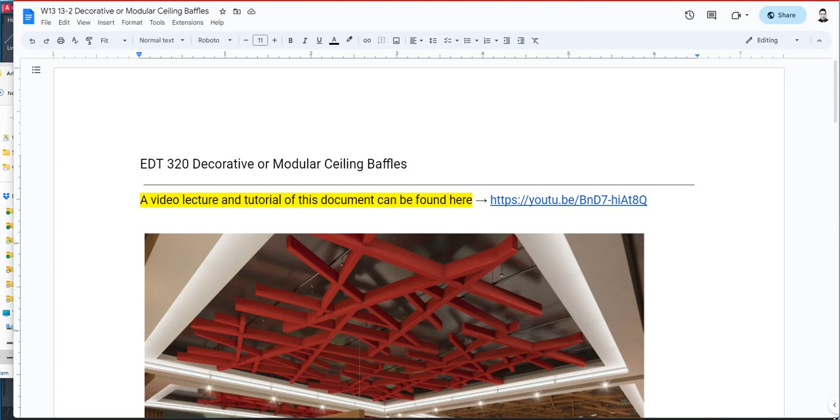So you're watching the video lecture and tutorial of this document, and when we discussed the ceiling plan, we momentarily discussed a baffle system used on ceilings. It's primarily a decorative element, but its real purpose is to stop the echo in large rooms. In a large room with no walls nearby, sound travels far, bumps into a wall, and bounces back, producing an echo. To prevent that, large rooms use a baffle system like this one, or sometimes the wall is treated with acoustic absorbing materials. So that's primarily its purpose, to stop the echo, but it's often used for decorative purposes too.

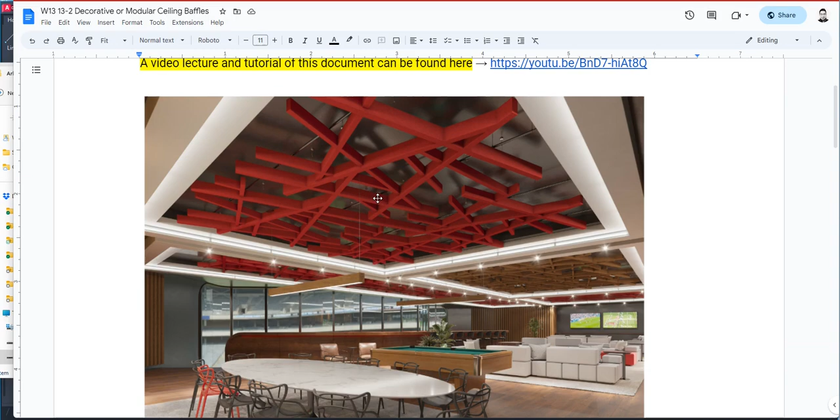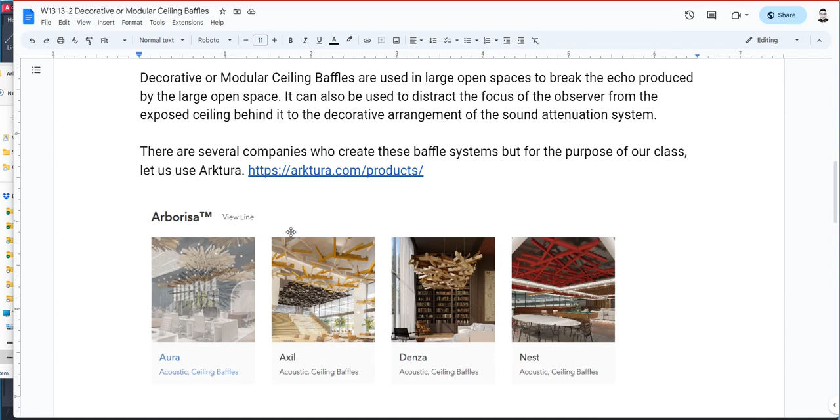There are several manufacturers of this baffle system, but for the purpose of our class, let's focus on Arktura products. There's a lot of products you can choose from the Arktura lineup, including some lighted systems. We're going to use either the SoftGrid baffling system or the Arborisa baffle system, and you can also see some geometric shapes under their SoftShapes system.

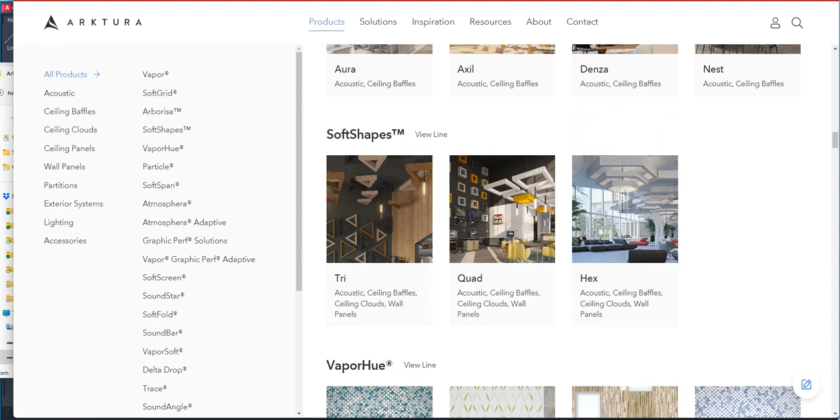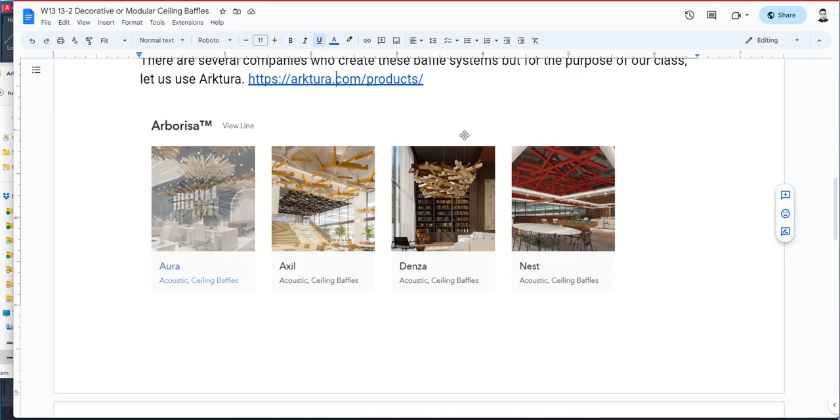Let's focus on our usage of the baffle system under the Arborisa product line, and we'll focus on this one called the Nest. Here's the Arborisa Nest, and you can see it's designed so that you can install several of them, and it appears to be modular. You can also cut them to width.

If we click on this one and open up the Arborisa lineup, you can see several applications of this system, and they come in different colors. As you can see here, there's information on acoustic performance, available materials, and available colors.

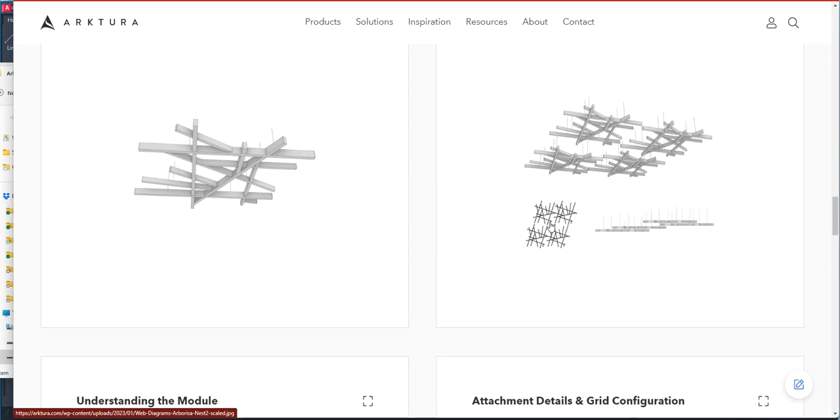Okay, and then you would see here the standard module, and how you can design the modules is basically like this. I don't know if you can see that closely, but let's use the PDF system here.

Arktura provides several downloads of their lineup, either in a DWG file, which is AutoCAD, or an SKP file, which is SketchUp. You also have the RFA, which is your Revit file, or assembly, a family file. If you've taken Revit, you can import family assemblies.

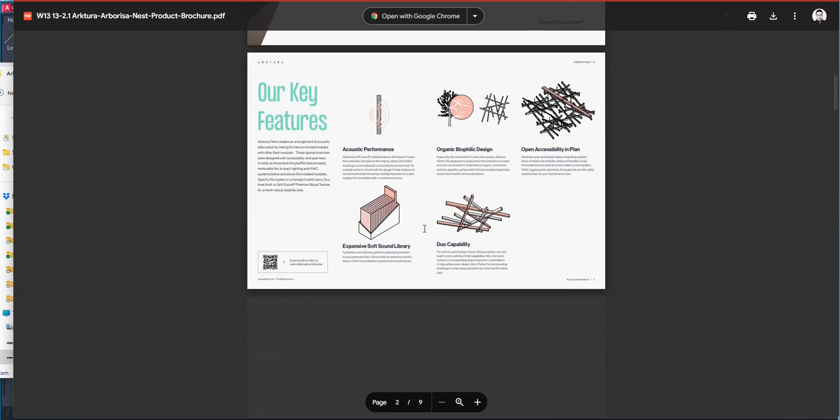And the DWG file, so let's look at this PDF file first. When we open the PDF file, it should show us how this module is installed, its properties, and everything about its color too.

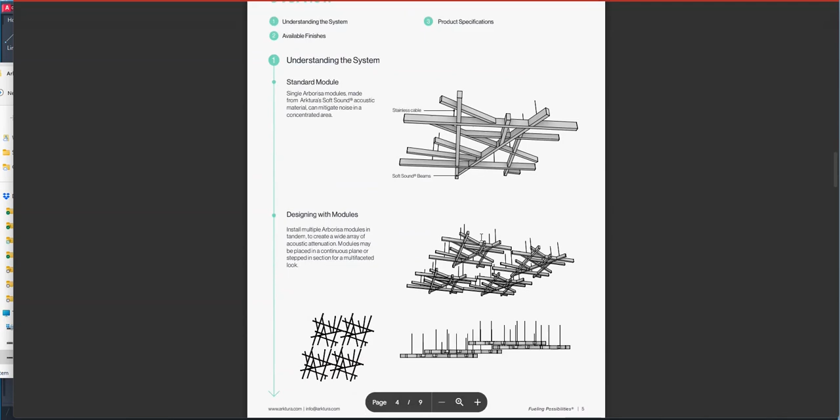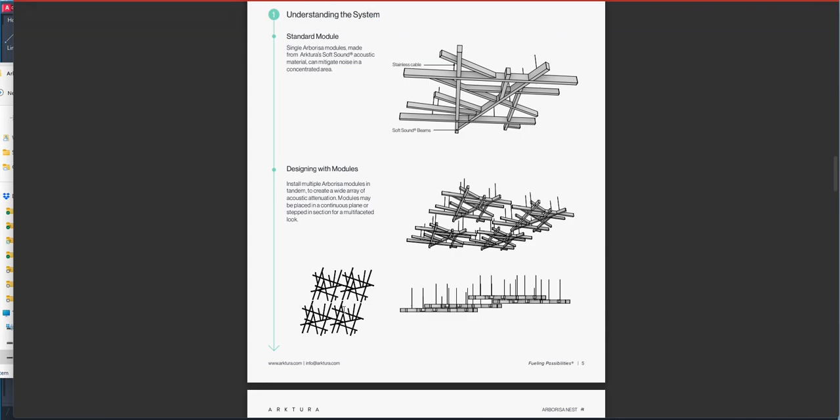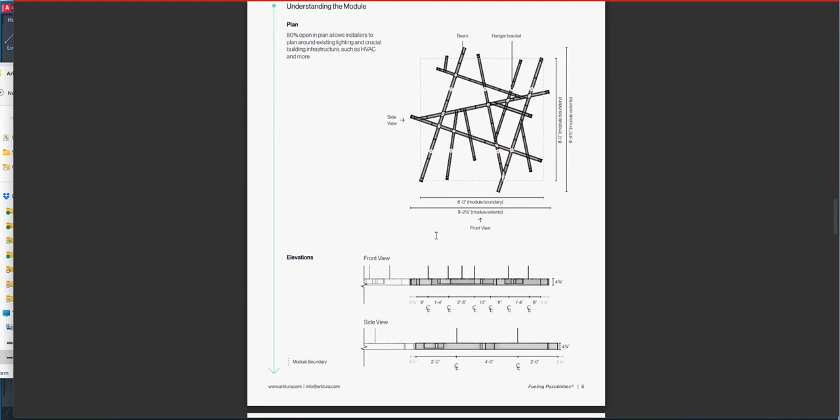It comes in different colors, and down here you should see how it can be installed in a module, like sort of diagonal, but you can straighten that up. And then here's the measurements and dimensions. These red dots appear to be where they are hanged from, so that's their hanging point, and their attachments are seen here.

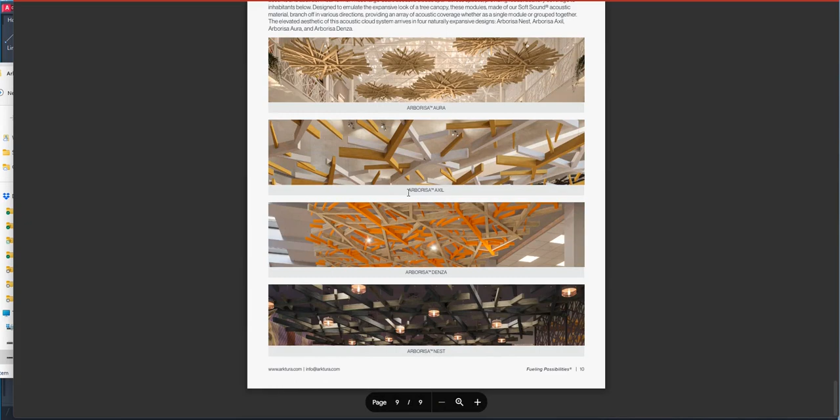Looks like there's a way you can join their modules like this. You can join them like so. This is another setup for their system. You can rearrange them, change colors, have dual tones, everything like that. Okay, so very decorative. Let's use that.

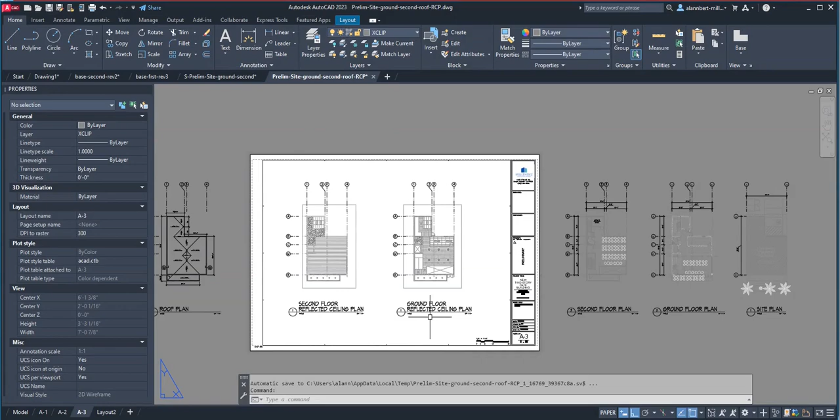Okay, so let's switch to AutoCAD. Here is now our A3 sheet with our ground floor reflected ceiling plan, with exposed lights. And here's our second floor reflected ceiling plan without the lights yet, because we're going to put in the lights for this one. There's, I think, storage or office space here. We need to fix this.

It's a little darker than the rest. But yeah, so we use a hard top ceiling here, or I use a hard top ceiling. But let's fix that first.

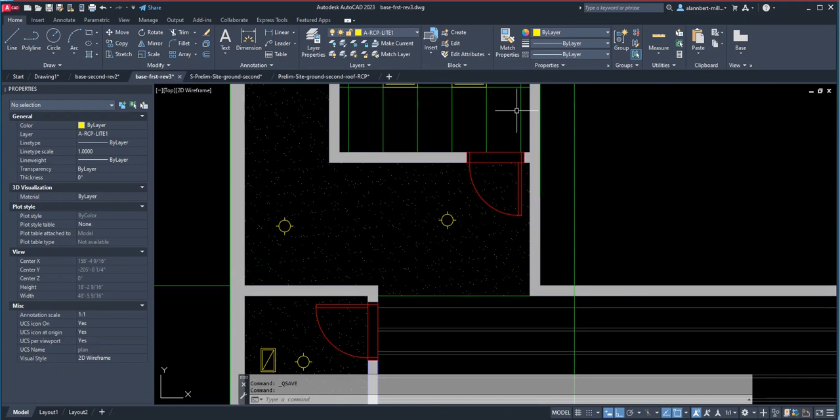Okay, I'm not happy with that one, so I'm going to click here and just match property this one compared to that, and this too. Okay, and then save that. Go back to my ceiling plan and reload, and then click check, and we're good.

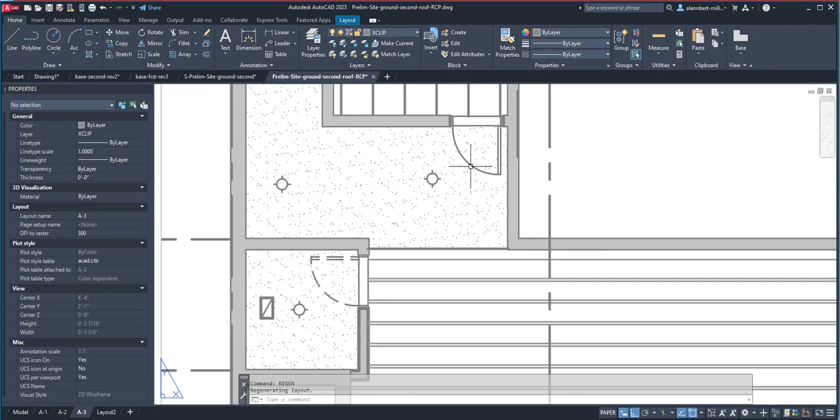So now we're good. Okay, so look at this door here. That's supposed to be how the doors are supposed to be. Oh, it went back. Okay, let me see. Regen and fix it. Okay, so the doors are supposed to be dash line like this, not this one. So we can fix that also later on our final drawing.

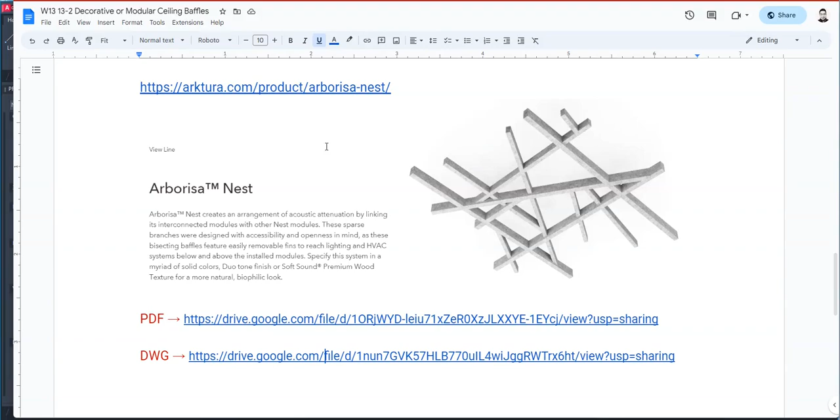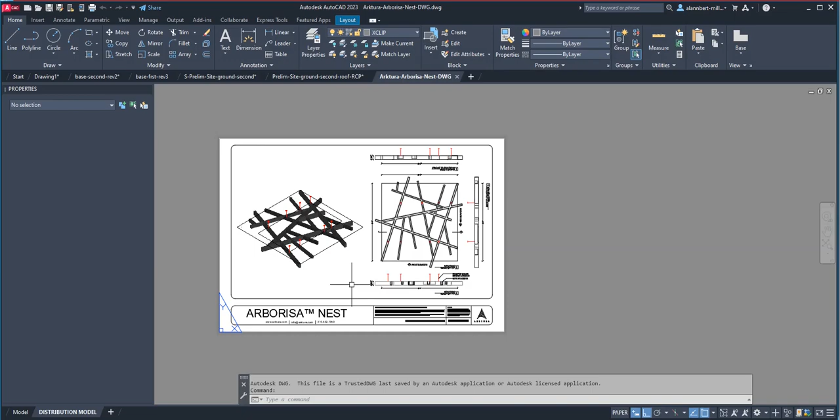Anyway, when you download the DWG file from its link location, you can now open it in AutoCAD. Let us open them. So open, and where did I save that? Think I saved that on this Arktura. There you go, I saved that there. I open it, and this is the DWG file that's given to us.

So what I'm going to do is copy this whole thing, and it's in feet, 8 feet by 8 feet. Okay, so I don't need to copy dimensions, just this portion. I'll erase the rest later.

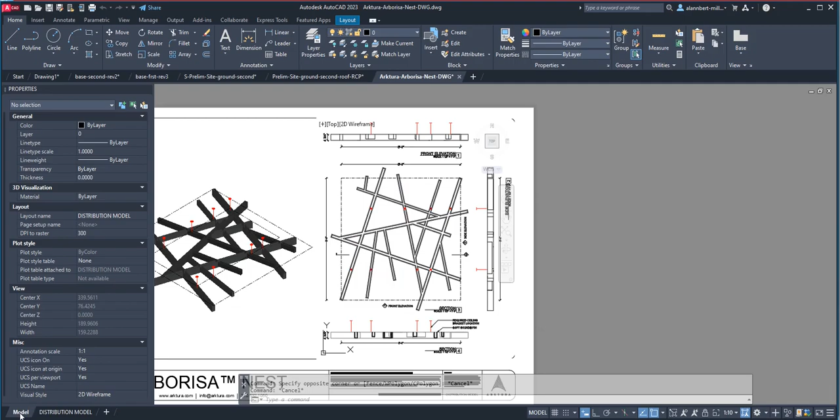Let's just do the model. If there's something in the model, is there something in the model? Yeah, there it is. And it's a block here. Can't see it here. I wonder why. Why can't I see it? Because it's black. Okay.

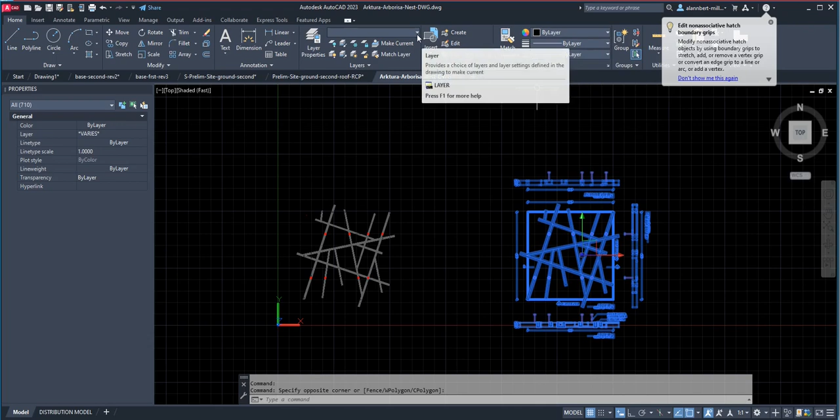Let's switch to distribution model here. And now if you click that, you see that some of them are not selected. So I'd rather just have the viewport on. Okay, so I'll just select this whole piece here.

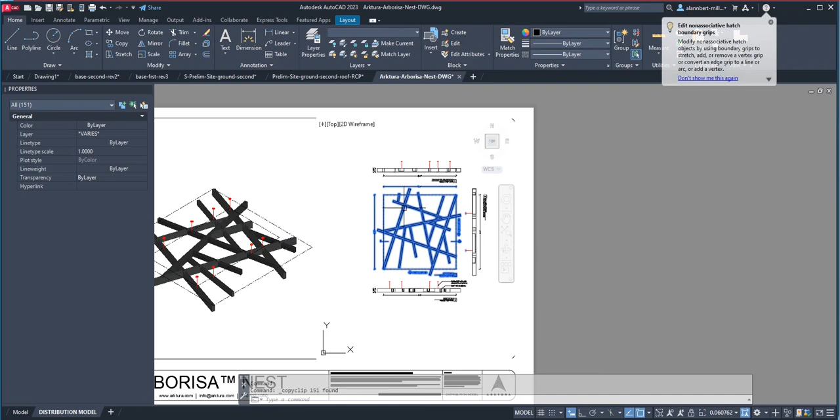Control C, or right click copy, go back to my ground floor, and where should we draw this? We draw it on the ceiling plan of wherever our base floor is, and Control V here.

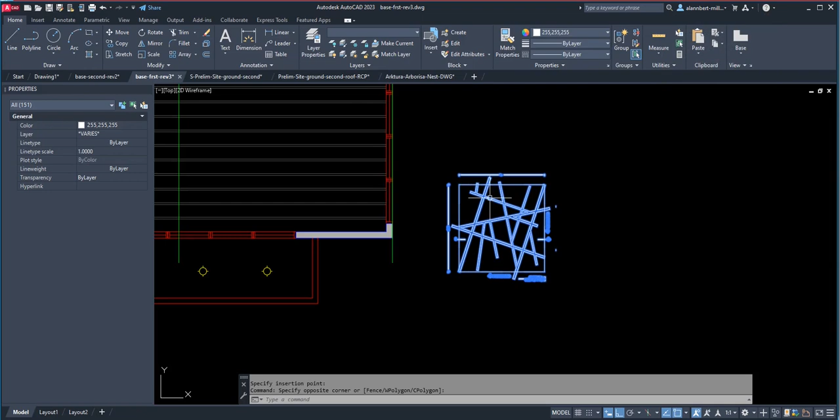And I can't see it, so make sure I select that and change this to let's make this white first, and then we'll make a new layer for it. Layer, and then we're going to click A-RCP, and then put in Baffle. Okay, and then we'll change that to red. Okay, and then close that.

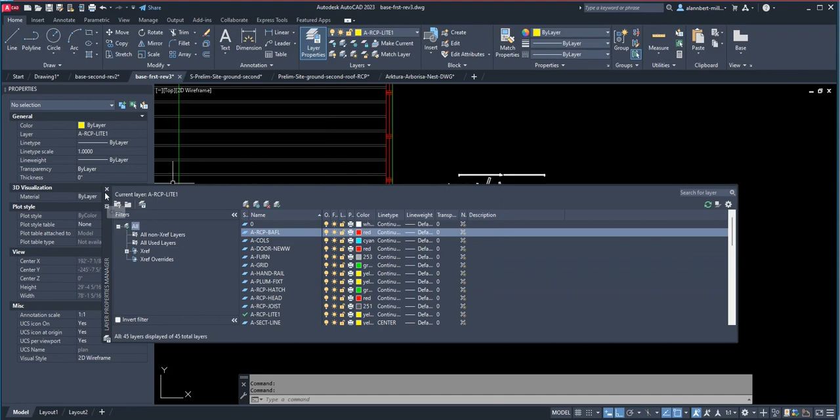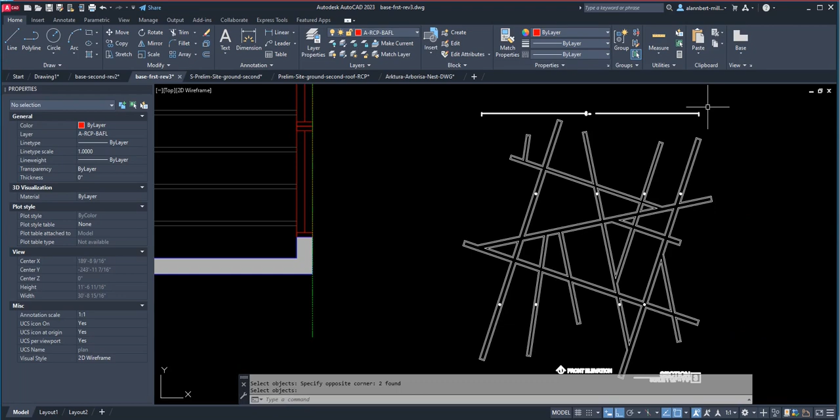Switch this to the baffles. And then I don't want this, so I'm going to erase this. Don't need this too. And I don't need these two. So is this, so is this. Need this and this one. Okay, and then simply select and change that to the baffle, RCP baffle here, and then make sure we change that to by layer so we can see everything.

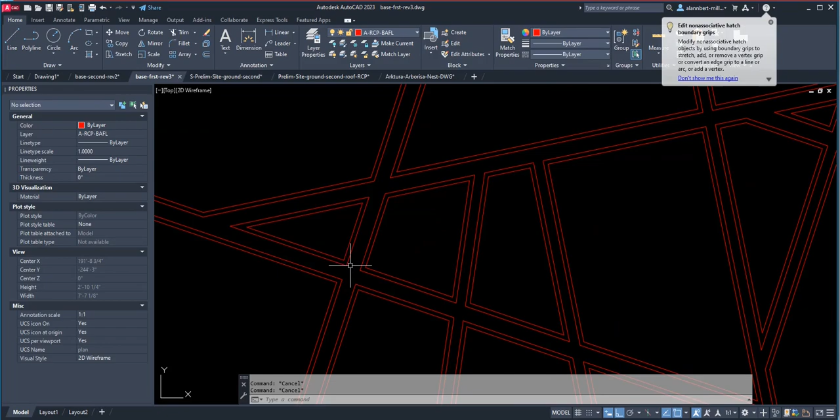It's double lined, so let's see how it's going to look like later on the preview. You can compose how it's going to be, and you need to select where you want to put it. Now we know that there is an opening on the second floor. So if I put my baffle system around here, which is this portion here, then people entering the ground floor can see the second floor opening and can see the baffle system.

So I'm going to choose to put that somewhere here. Okay, and so we'll go back to our base plan. Now I have to decide what's the orientation of my baffle system. Okay, so I will just do a rotation. RO. And let's just rotate that 90 degrees first.

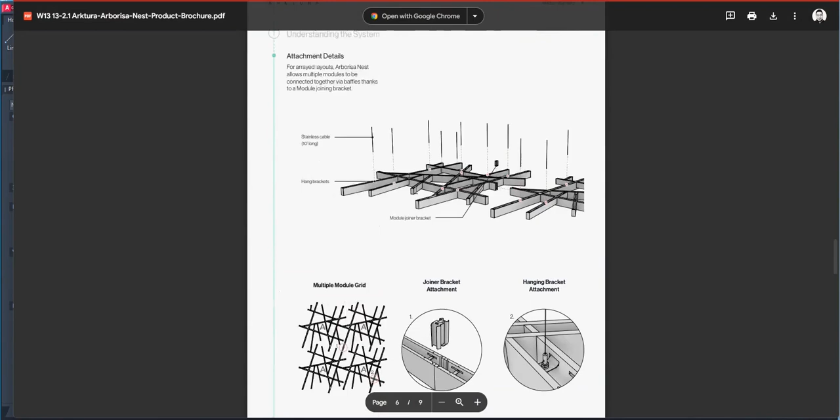There you go. Okay, now according to the PDF, I don't know if I've closed the PDF already or something. Yeah, you can arrange them this way where you are connecting the long elements like this. So I may decide to put it like that. So I have to see.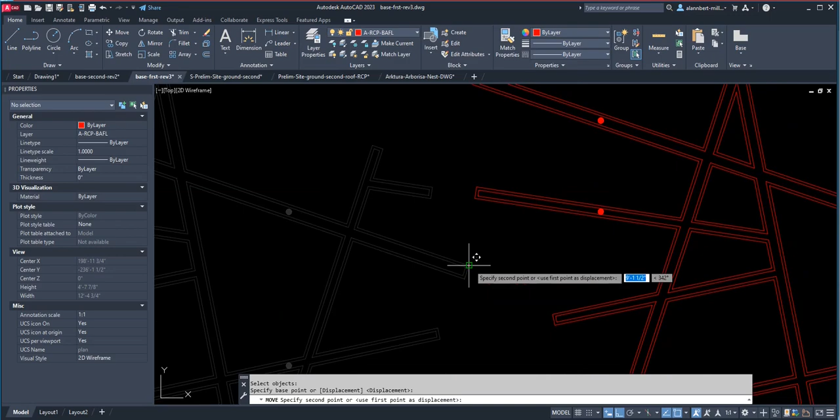Okay, so I will copy and I will connect this leg with this leg here. Oh, I didn't copy, did I? Copy, select, and connect that to this leg. There you go, I'm connecting it that way. Okay, and then I can rotate that whatever direction I want.

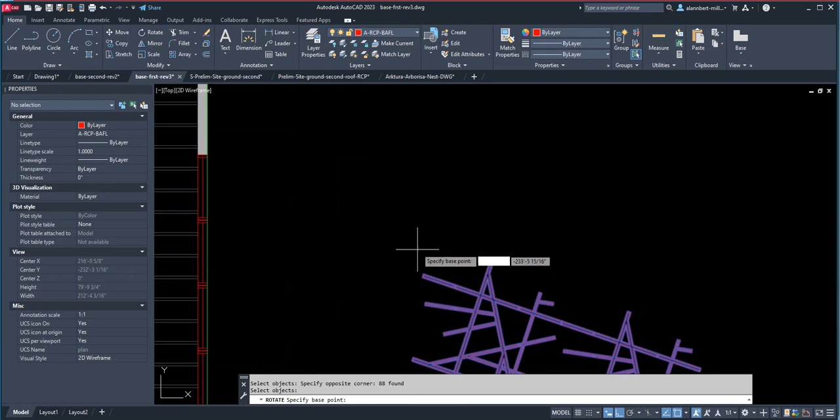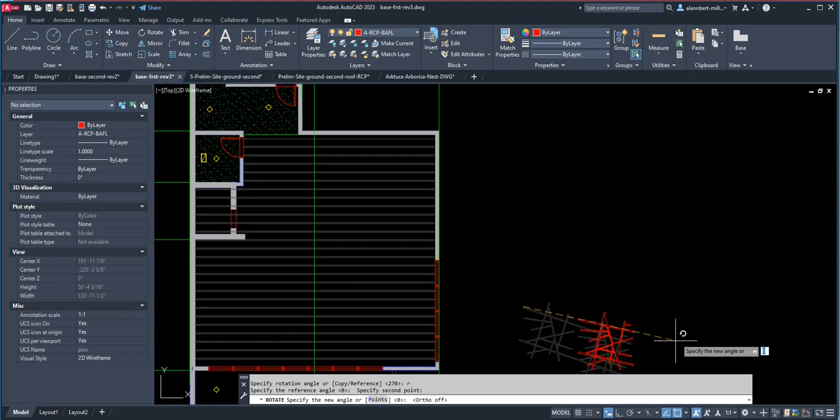And maybe connect this other half too. Before I do that, let me just make this a block so it's not all going to... and let me erase these brackets. I don't need to see them right now because they can be positioned anywhere, so I don't have a bunch of dots.

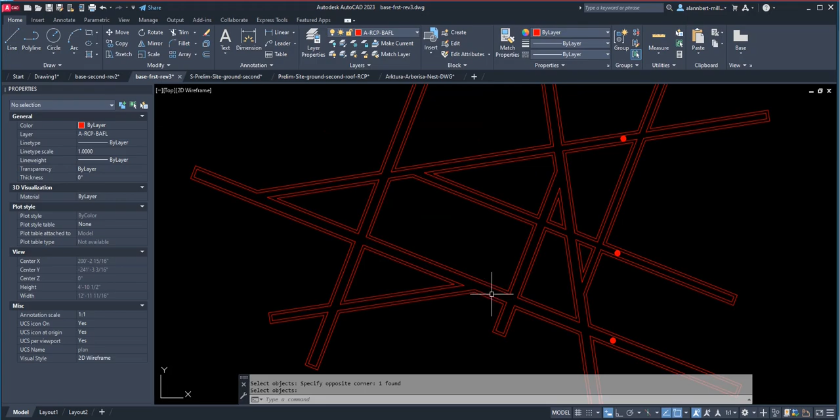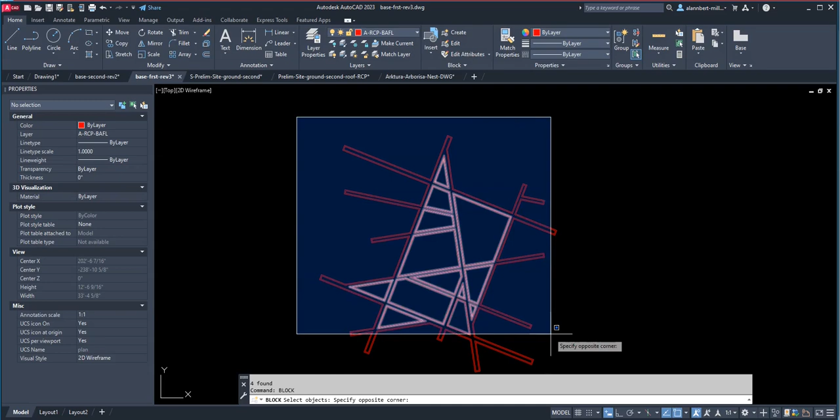Then I'm going to just create a block out of this one block, and I'm going to call this the NEST. Click OK. Select objects, select everything. Enter, and then where's the base point? I'll just select this point here and then click OK. And there you go, so this is now one system.

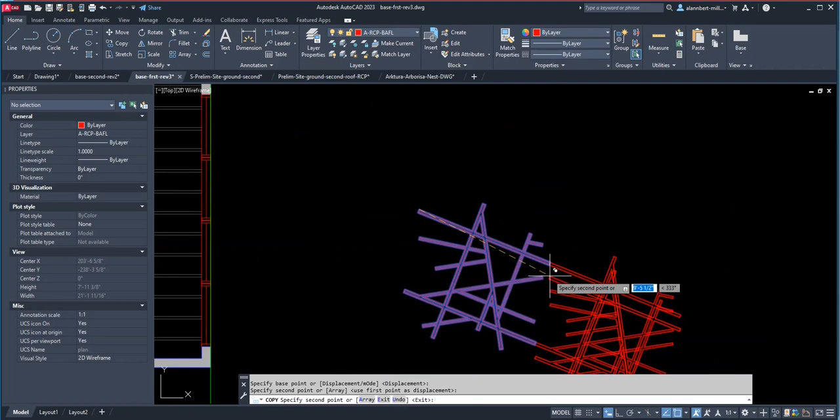So I can just copy and connect again. Copy. Connect this corner to this corner. Okay, and then see if I can make some other connections that work for the system. That one.

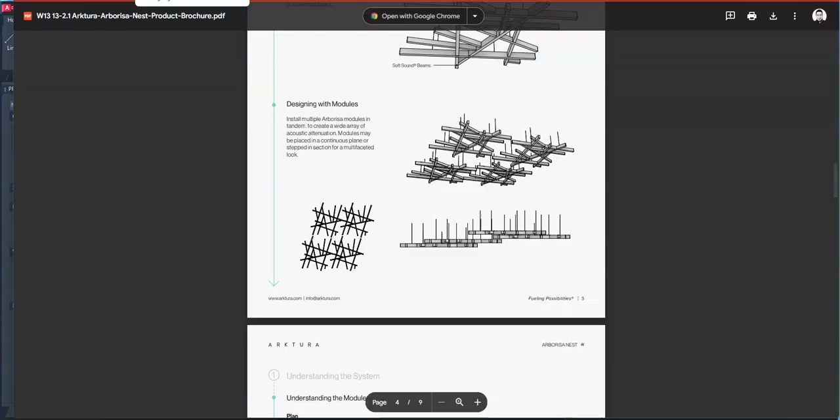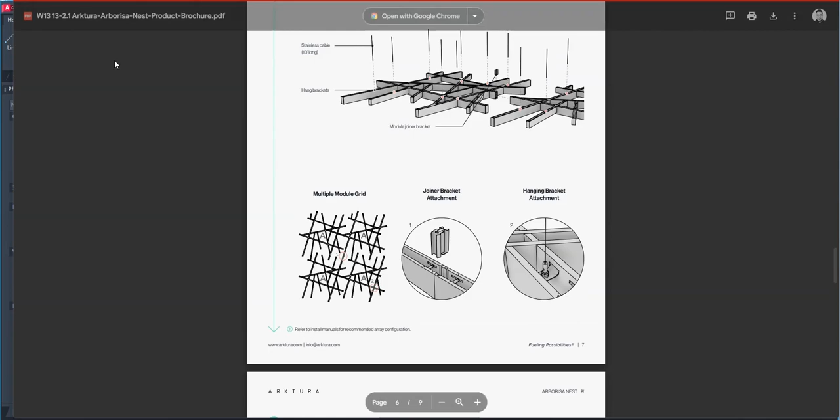If I connect it like this, let me look at the PDF again. For the PDF, I can connect it this way so they're connected on that long edge, or I can connect them like randomly like this. So you decide on your own design how you're going to connect them.

Okay, so I'll probably connect them. And where was it connected again? Is it like this? Yeah, I could connect it on those two ends like this. Yeah, could I be able to connect that? No. How about this one? No. Yeah, so you only connect it that way.

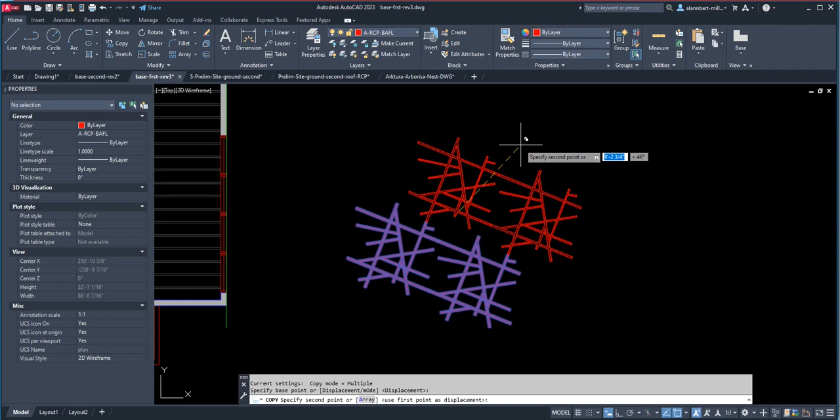Okay, so move it here, and I'm going to just move that and connect this corner to this corner. Oh, it's not, they don't match up. There you go, there you go. So you connect it that way.

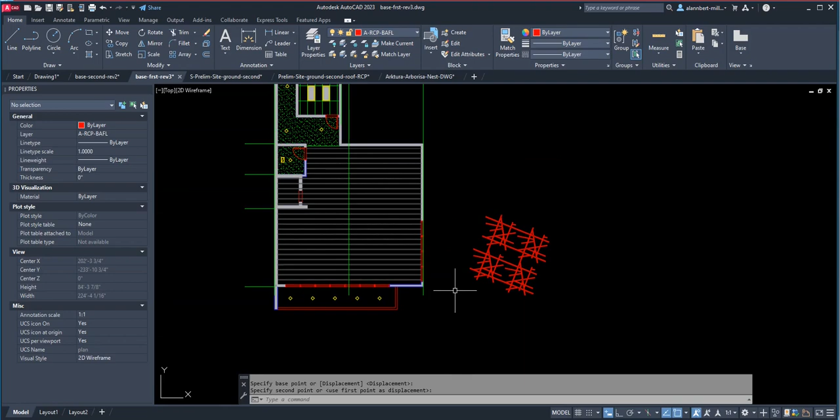Two square for me, huh? Yeah, two square. I don't want, I want this one. Maybe I'll put that here.

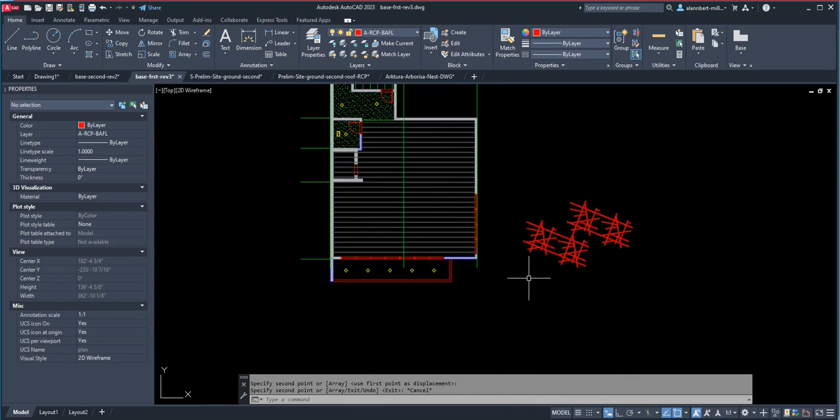Okay, and then I probably want to change the angle still. Maybe something like that. Okay, and then I'll just move that wherever it's supposed to look that way.

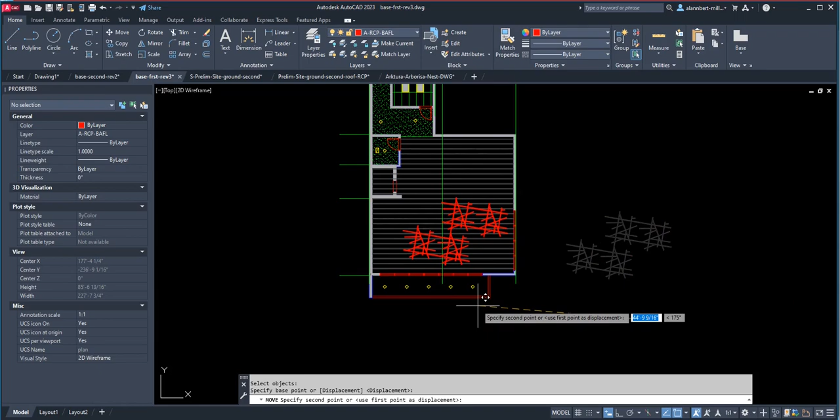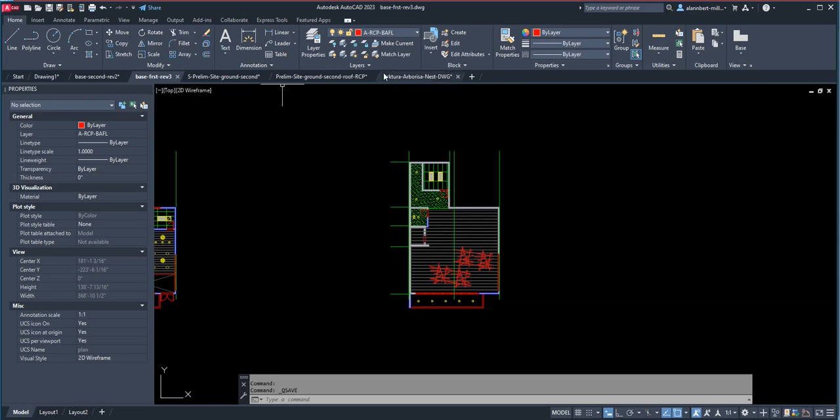So people can see, when they come in, they're going to go and see through the ceiling, and this is where they can see this hanging up in the ceiling. Okay, I can just put it here. I can put it all the way inside here, but let's just see what the effect of this one would look like. Just save it, go back here, then reload, and that should appear here right away.

Okay, and then I'm going to just do a preview and see what it will look like. Okay, there you go, that's what it will look like. Dark.

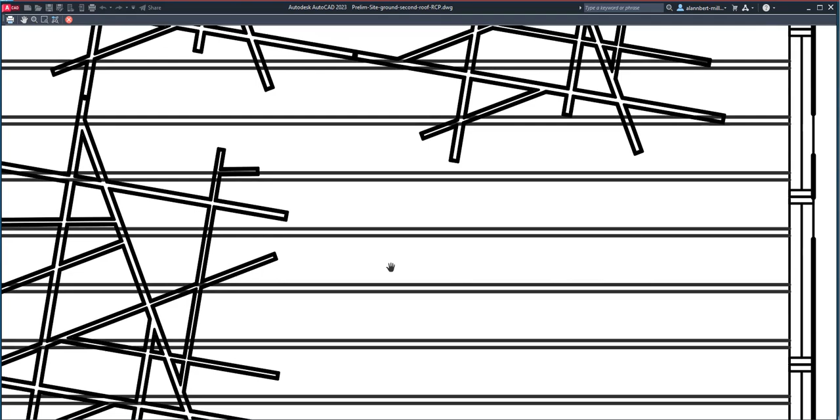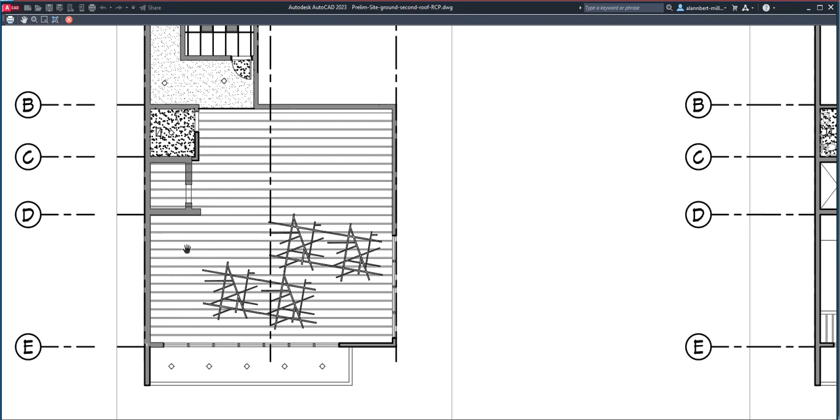Yeah, okay, and then I can now work on the lights. On the elevator shaft, there is no ceiling because you're riding the elevator car. So all I have to do is put in the lights, and I think we're going to be done with the ceiling for the first floor and second floor, and then we're going to work on some details next.

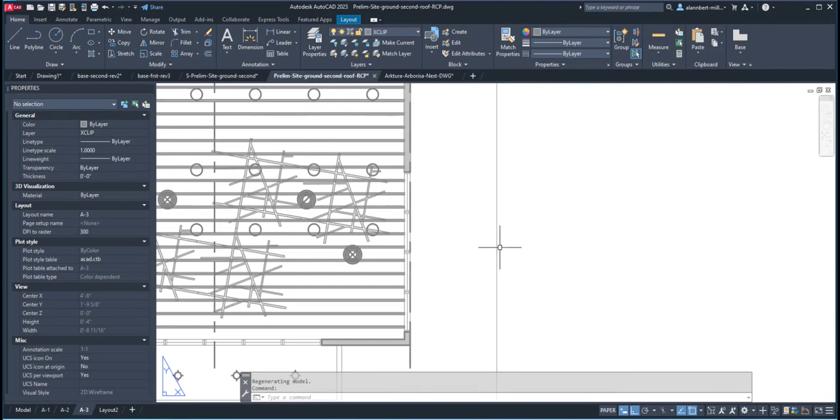So let's see what the lighting would look like on this plan. Okay, so we laid out the ceiling. We have a baffle system, the lights are placed, and everything is good. And then all you have to do is now you may look at it as gray, but it's really not gray because you can only see that when you do a preview, and then you can see that it's actually dark. Okay, there you go.

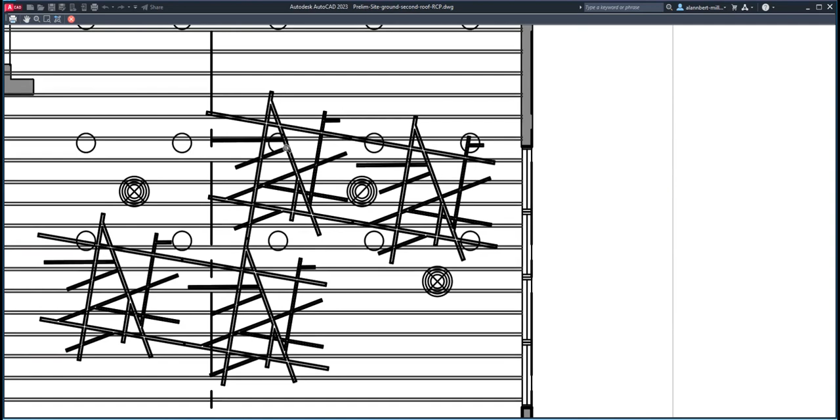So that's primarily what we're going to do. You can see that the light system is over here. You can make the light system pop up a little bit, but we're just going to leave it like that for now. Okay, and then we're going to do some notes here on the side, what these are, and some general notes as well on our next document.

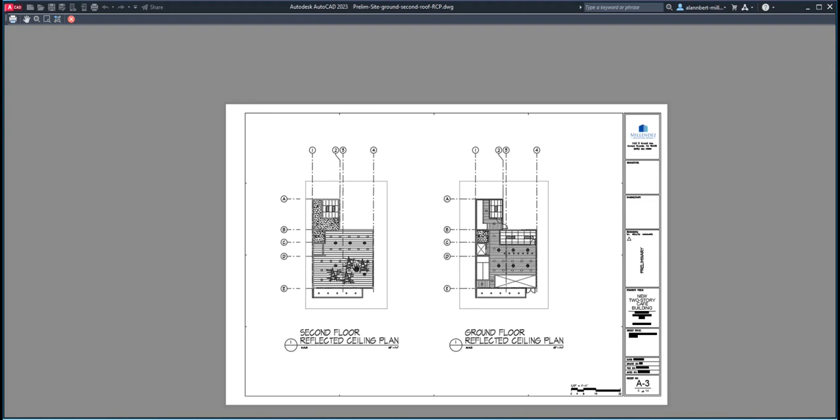Okay, so yeah, finish your second floor and ground floor and put your baffle system, and then you put the lights in. And we'll work on the continuation for our notes. Okay?